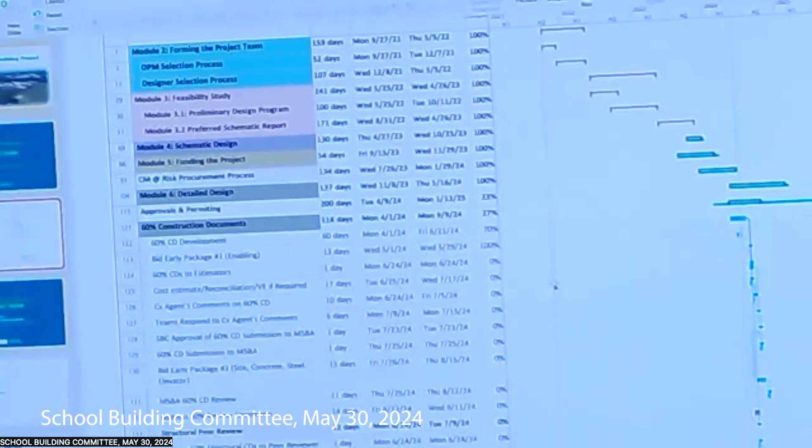And GAGs is Gagliarducci, correct? Just making sure. Jamie, you said GAG's at the number, Griffin's slightly below. They're both slightly below from what was advertised. So you guys gonna send us subcontractor recommendation letters? We asked Ben how he wanted to roll with that. I think he was waiting to talk to you.

Yeah, typically that's what we do. I would like you, especially for the early packages, to compare the bid price versus what was carried in the estimate, so we know that we're on track. If there's a savings or overage or whatever.

And the next package to go out, Jamie, is what? EP2, which is the entire site, concrete, steel, below grade waterproofing, elevator, and then some electrical equipment material. What's the date on it, Rich? 25th. Are you guys tracking on that? Oh, yeah, I know that date for a reason.

Vacation on July 6th. All right, the line item 124, it's 60% CDs to estimators. 624 is the due date. Correct. Hard for that? Yep.

I'll just hit on a few of them here. Line item 125, the cost estimate reconciliation running out till 7/17. And then line item 126 is the commissioning agent's comments on the 60% drawings, and that runs out to 7/5. So that doesn't give them a lot of time, basically only 10 days.

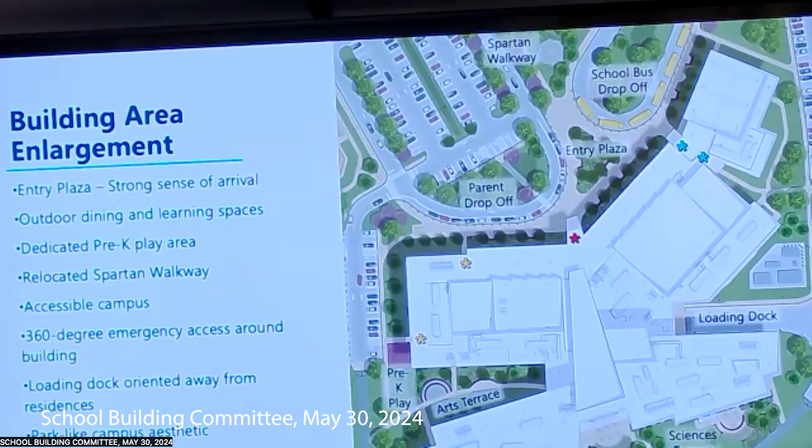And then we'll go into the individual areas. You can see we've updated the sciences terrace, the dining terrace a little bit, and the arts terrace is still a little bit in flux. So I'm not going to spend too much time on that today.

One of the first things I wanted to talk about was the discussion on the number of bollards and maintenance at the parent and bus drop off. Before, everywhere highlighted was flush curb, shown in green. We revised the school bus drop off, replacing 400 linear feet of flush curb and bollards with vertical curb, which allowed us to remove almost 39 bollards.

In the morning, when school buses are doing more of a rolling drop off, there will still be a flush area at the school bus drop off that can accommodate 6 school buses. In the afternoon, the buses can still use the entire loop, which will support 14 buses. We just didn't think we needed a flush condition to serve all 14 buses anymore, which allowed us to get rid of a number of bollards.

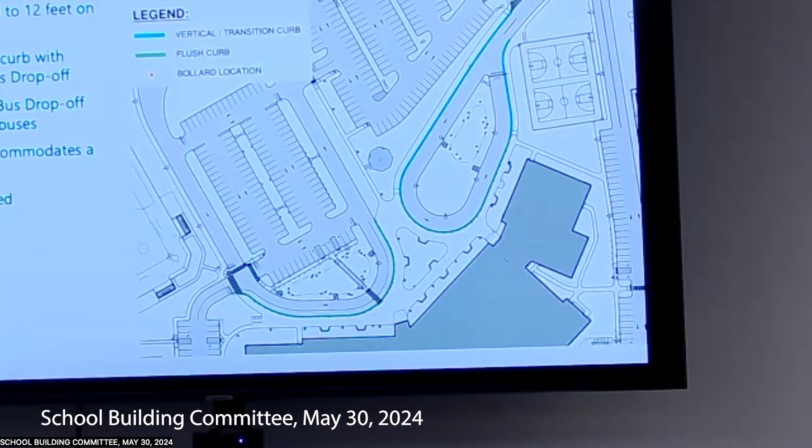I have a question about the bus drop off. I take the bus in the morning and we get there first, but I've been on a bus that's been late a couple times. I noticed students are always standing outside the school rather than going inside to sit in the cafeteria like at Birchland. Will there be shelter for these students in case of rain when they're standing outside, or is that more of a question for staff when the school opens?

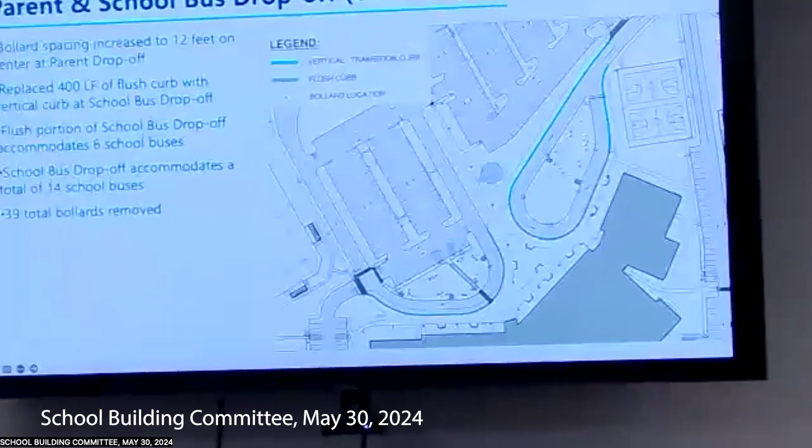In terms of outside, there are not going to be any canopies outside other than at the front door. There will be a canopy at the pool building that people could stand under, and a canopy at the entrance to the main school building, but not one of those long linear canopies.

My question is more like, do you know if people are still planning on having students stashed outside before school starts? It's an operational question. That will be something we'll have to answer as we get closer to opening the school. It's a good question, though. All right, thank you.

Staffing inside earlier - so that's just an update. Just wanted to let everyone know we've cut back on the number of bollards and simplified that.

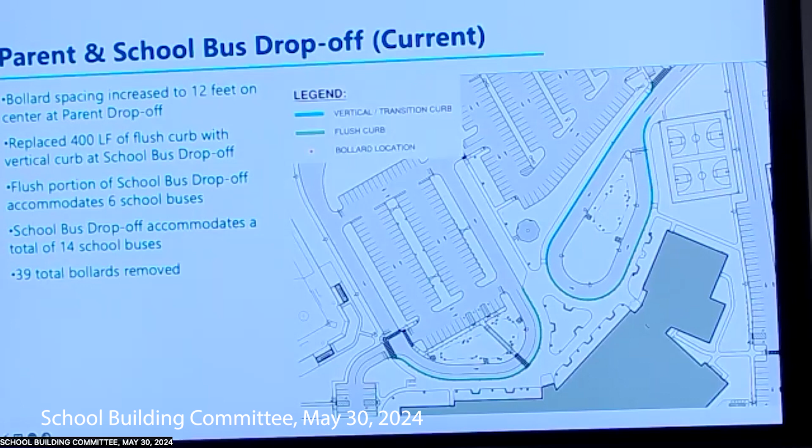We've actually started documenting the layout pattern so we can recreate it in its new location, which was super helpful, along with all the engraved bricks that are out there now. One recommendation we'd give the school and committee going forward, since this has been documented, is to maybe not install any more at this time, since they may not get picked up and we wouldn't want to see them or their location missed.

So start a new program with the new school - early adopters. All new bricks will be used except for the engraved ones, which will be reused. When we met with Rose, it was very clear each of those bricks needs to go back exactly where it was, so we are drafting that patio down to every joint of every brick, thanks to these photographs, to make sure we can plug them back in exactly where they are now in the new location. That'll be an enlargement detail.

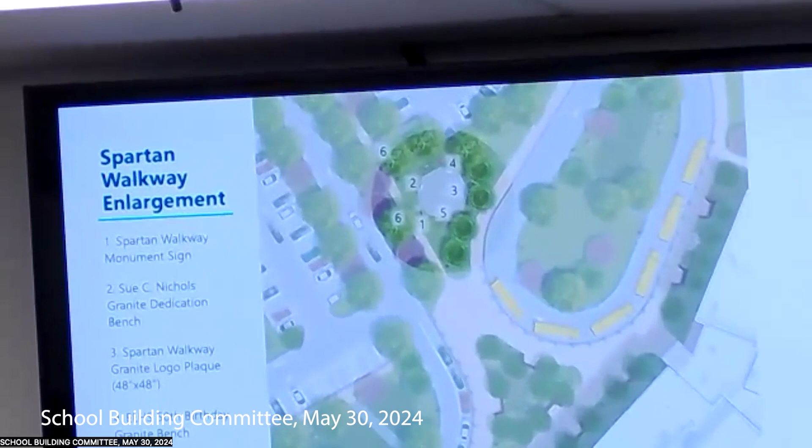Now a little update on the Spartan walkway. When we met with Rose, the desire was again to recreate it. There are a couple things out there - the masonry unit walls as you walk in were deemed not critical to the design of the Spartan walkway according to Rose. We probably will not replace those because we want to keep it a little more open as people walk in.

Another thing is the plantings around it were not deemed critical, but what was critical is to have something with interest all year round. That'll be our responsibility, to create a border planting that provides opportunities for people to take pictures with a nice backdrop. That's something we need to look at as we develop the planting plan.

But you can see what we've done here. Right now the existing patio has 3 bump outs for benches. What was discussed out in the field was to eliminate those bump outs and enlarge the patio by a few rows of brick, so that in the future, if more benches were donated, you'd be able to locate them around the perimeter of the space instead of being limited to those few bench nooks. It'll also make maintaining the area around the Spartan Walkway a little easier.

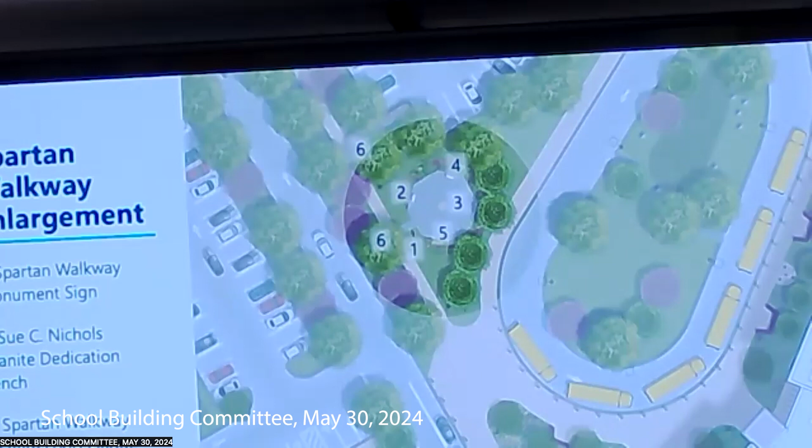So you can see we picked that location on the main pedestrian spine from Maple Street into the main entry plaza. Gordon, maybe you could speak to it, but it seemed Rose was pleased with that location and thought it was a good bet to move forward with. She was very happy with the new location. So, next slide.

This bridge will cross the bioretention area from the staff lot to the main entry. The width will be about 6 feet clear—you want to make sure that if necessary, two wheelchairs could pass, and 6 feet seems to be that width. The span is 56 feet right now, from abutment to abutment, with no central support.

There's a bridge in the budget right now for the retention area, for the water.

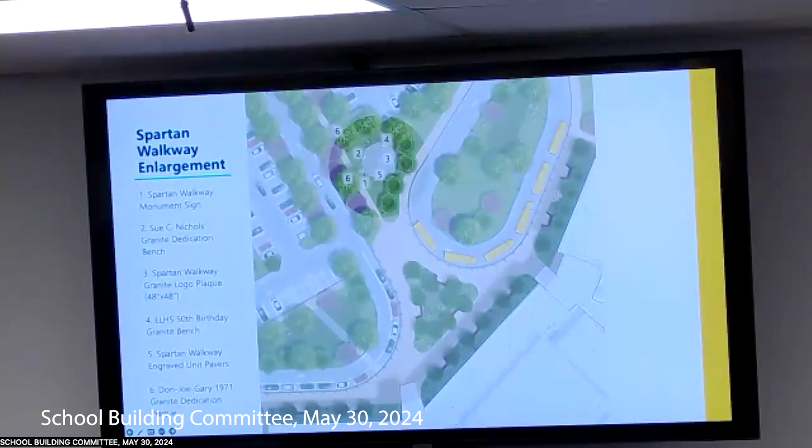Like, where would this just be a pedestrian bridge to cross? Is there a stream or something? So there's going to be a bioretention area for stormwater collection, and the bridge is going to cross it. That'll look cool. But it's not the only way to get to the front entry—if it were, we could make it a moat. I thought about a drawbridge, or a toll bridge.

So these are just some images of the bridge idea.

What are your plans for in there? Because I know, for instance, in East Hampton elementary school they put stones—mostly a stone kind of thing, and it looked really pretty. But I think on the kids' first day of school they were picking up the stones. These guys are older than that, but...

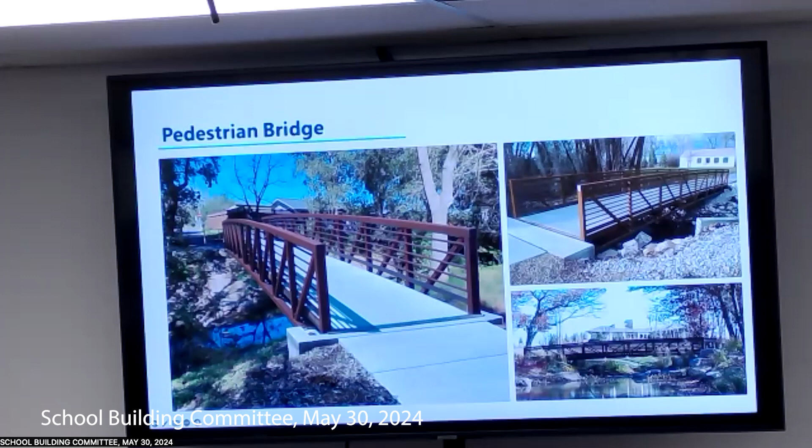So what we're planning to do is take this bioretention area and sort of evoke the redstone quarry motif. For maintenance purposes, it's going to be planted with a wetland wild native grass seed mix, with some wildflowers in there too—that'll be the predominant cover. It only gets mowed maybe once a year, with no shrubs and no trees within it, because that makes maintenance a nightmare. So it's just going to be that herbaceous seed mix, and we're hoping to get redstone boulders to place sporadically around the perimeter to give it that long-since-past quarry feel.

Nothing—if they can pick these things up, then power to them. As for lighting: when you cross the bridge at night, is there any lighting to light it up? We're working on that. There won't be lighting on the bridge itself, but there will be lighting from the parking lot and the entrance drive that will adequately illuminate it.

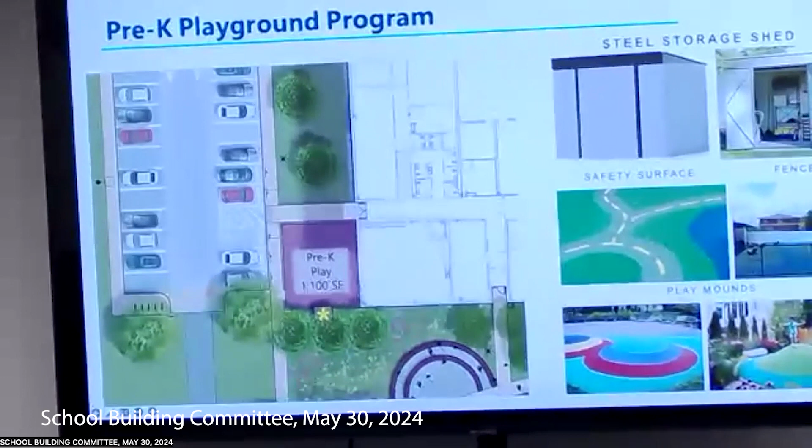Good question - we make sure there's appropriate distribution. For the pre-K play area, we'd like to reach back out to Juanita if the committee's okay with this idea. We had a lot of thoughts about this area initially, and in schematic design we went through a VE process. Right now what's proposed for this play area is roughly 1,100 square feet.

We're looking at resilient rubber playground protective surfacing throughout the enclosure, with a black vinyl coated chain link fence around it with 2 gates, giving 2 points of access that can be controlled by staff. Juanita had requested a 6x8 shed, so we're looking at something steel and low maintenance that protects whatever's inside from the elements, and we'll try to find something with a similar color to the metal paneling on the building.

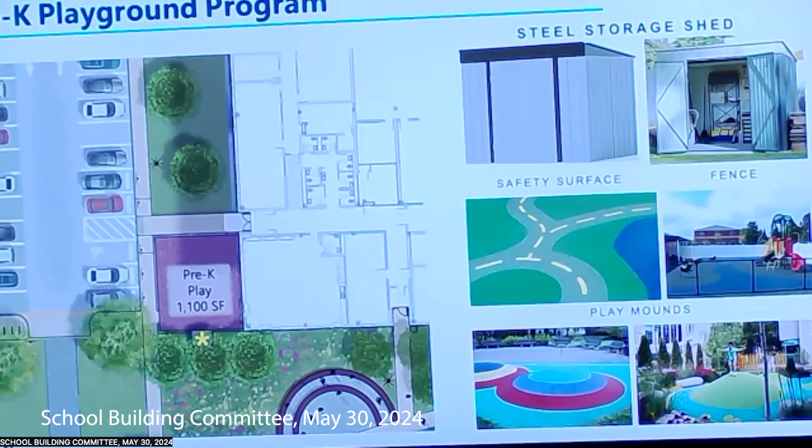These are just precedent images, not the exact products - just to give you an idea of what's possible. We're pondering doing some mounding of the rubber surfacing for kids to play on within the enclosure, and thinking we'd reach out to Juanita to ask if she'd prefer something mounded in there, or if she'd prefer it flat so it can be used for whatever the program requires.

Was that poured in place, the rubber tiles? Poured in place, yeah. If it's a mound, we'd typically do that over bituminous. If it's flat, we can do that just over crushed stone so it's fully permeable. It just depends on the treatment in there.

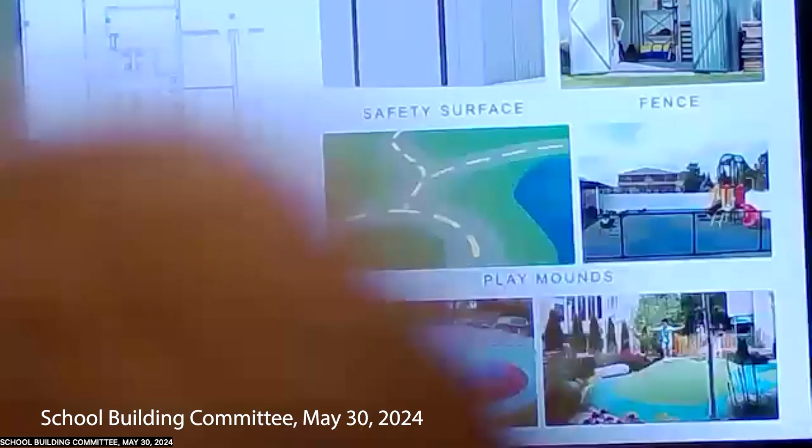So if the committee's okay with this, this is the direction we'd go - no play equipment, because that was VE'd out, so there's no play equipment proposed, just the shed. When it comes to the shed, let's make sure it's reasonably robust, because those things get beat to death.

Is that going inside the play area? Yeah - you can see the yellow asterisk is where the shed would be, tucked out of the way. The idea is the shed would be on a concrete pad, with a concrete edge around it to hold the rubber surface in place, and that's also where we'd set the fence. The fence will come right up to the shed and end there.

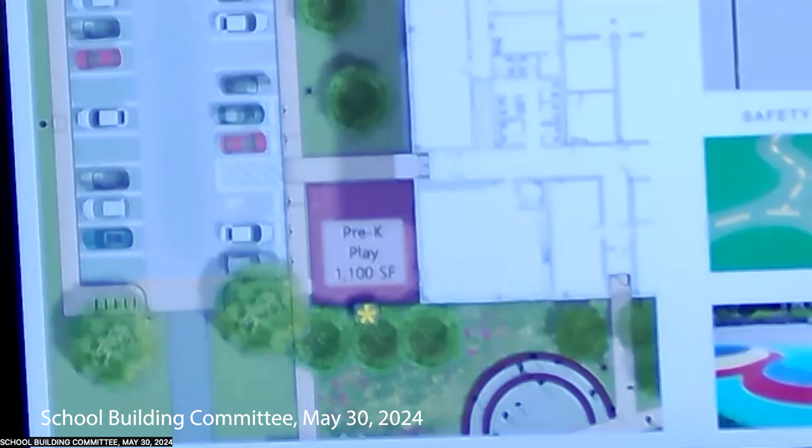Small point on this section - I know these are the bathrooms we're allowing access to for the fields. Can we put signage to that effect, letting people know there are restrooms at that door? Great idea, without being tacky I suppose. If we're gonna have them, we might as well tell people where they are. It would be building mounted. Okay, we'll put it in our cart.

And that's completely secluded, right, Christian? That works as we intended. Right, so we can close off the doors in the hallways.

We also made a modification to the seat walls at the front entrance. Originally we'd discussed curved, almost half-moon or half-circle shaped seat walls, but they were a little too big and didn't really respond to the architecture, which has more of a splayed look - more angular and geometric. I also thought about sandstone and how it's typically carved, with angle points that are more geometric.

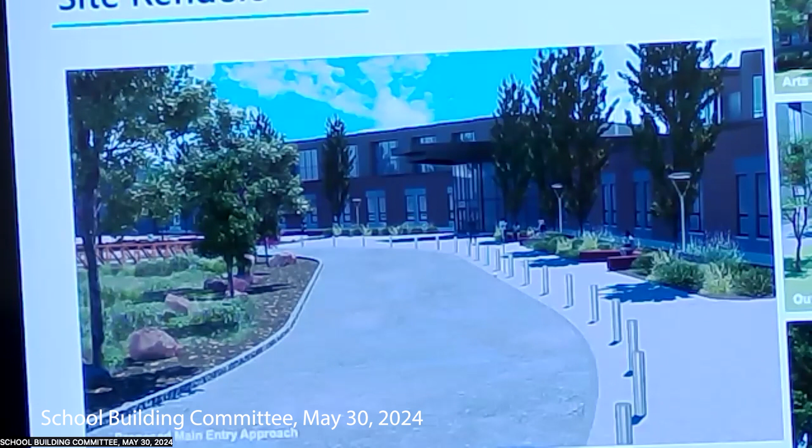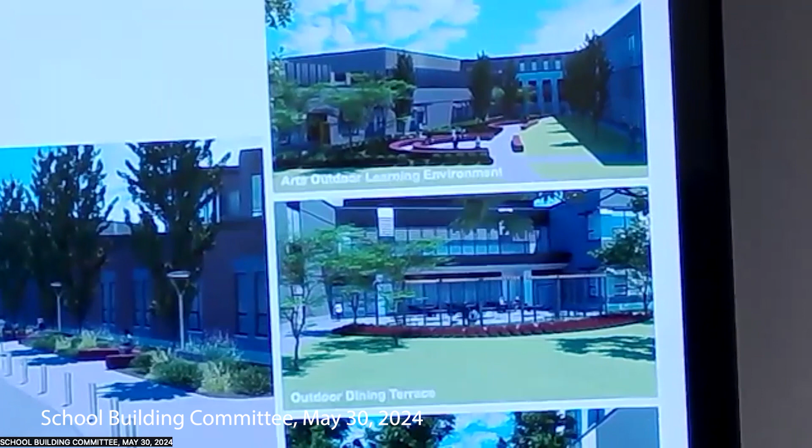We're still keeping the round shapes right now in the sciences outdoor learning space. You can see there's still a shade structure there, and you can see the outdoor dining commons also with a shade structure, and then the stadium seating in the arts area, the double ring.

The idea is that we'll have two seat walls, and one will maybe be 6 inches lower than the other. So for all performances, that's gonna be fantastic, just that minor variation in the height of the seat walls.

And this is just an enlarged view, more so the one on the right I would say than the one on the left, but this is the shade structure we're looking at. Again, very simple, galvanized steel, simple maintenance, but will still function to provide shade in that dining commons, with seating under it.

It'll also be the same piece used in the sciences outdoor learning space, where there'll be an outdoor spot where kids can sit on the seat walls, and there'll also be a second layer where kids can work underneath that shade structure. We just had to keep it a little further away from the greenhouse so we weren't shading it.

Is it wood or faux? That's real wood, but it's minimized. It's the steel ones—we weren't thrilled with what we'd seen for the slats. We felt that of all the places, this might be one where wood is typically pretty durable. It has a lifespan, maybe 20 years, 15, roughly—I don't know the lifespan off the top of my head.

I could get you that information, ballpark-ish. What material is it? It's ipe or some kind of hardwood—won't be ipe necessarily, but you can afford ipe, right? Yeah, it's usually hardwood of some kind. I can't recall exactly what this one is, but we can find that out for you.

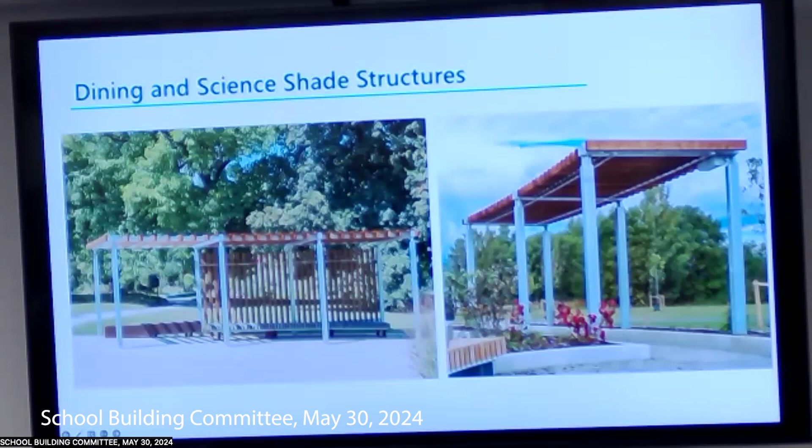Will there be outlets, like kind of closer to the building, where the little covered area for eating is, or out in any of these spaces, because their Chromebooks are never charged? So if they go up for class and the Chromebook's not charged, will they be able to plug it in? Will there be anything like that?

So there'll be electrical outlets and Wi-Fi, and I believe we're doing hose spigot hookups in the art space, the sciences space, and the dining space. Not in the front plaza, because we had discussed that wasn't as desirable as in those outdoor learning and dining spaces.

And that'll be further coordinated as we finalize the design. Never charged—plug them in.

So then a question had come up—Principal Frank Page had asked about, he's online now, oh great—he had asked about potentially adding a few gates to control student traffic.

So the first one to call your attention to is from the student lot. The idea is that when the school buses are yet to be released, Frank was concerned about students trying to get in front of the buses and leave before they do. Rather than having somebody go out and set up cones every day or stand in the road to hold students at bay, the idea was that before dismissal, those two gates could be closed.

Once the school buses are released, a staff member could go out, open those gates, and then the students would be free to use it. That's why we set them in—it's more about keeping students from leaving via those two points of access until they're supposed to than it is about people getting in.

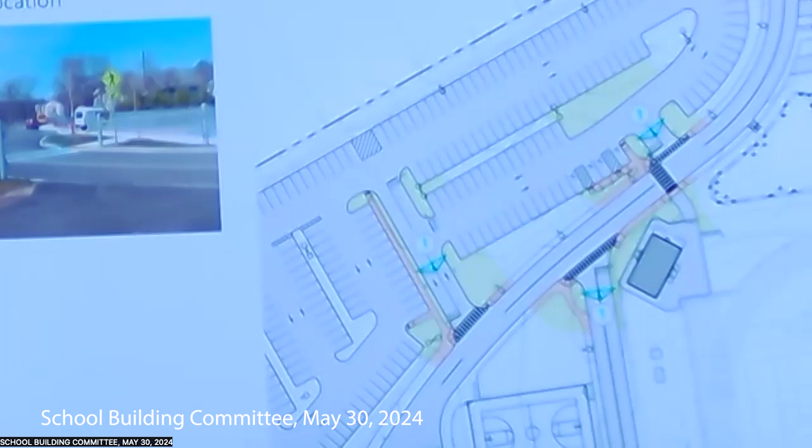They can leave through the other horseshoe, right? Yeah, the intent was that before the school buses leave, the parents or students would go out towards the main, the new horseshoe we'll call it. Swing gate or retractable? Yeah, you can see right there, because of the width, it would be a double leaf galvanized steel swing gate.

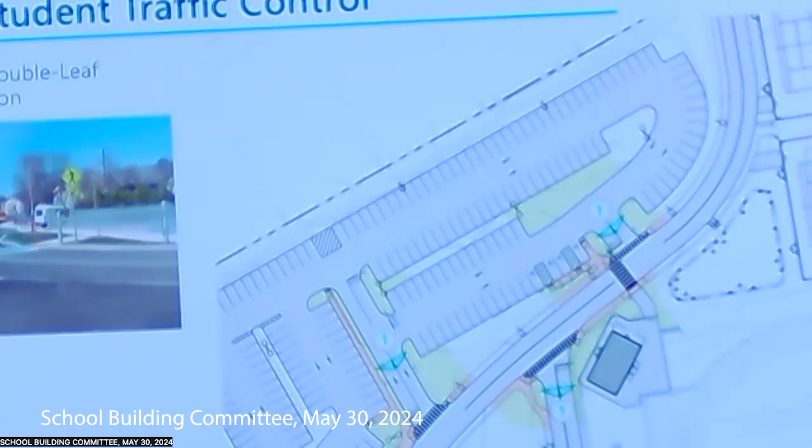Very simple, low maintenance, and there would be keeper posts to keep those leaves open most of the time and locked open in an open position when they're not closed. And that's just an example.

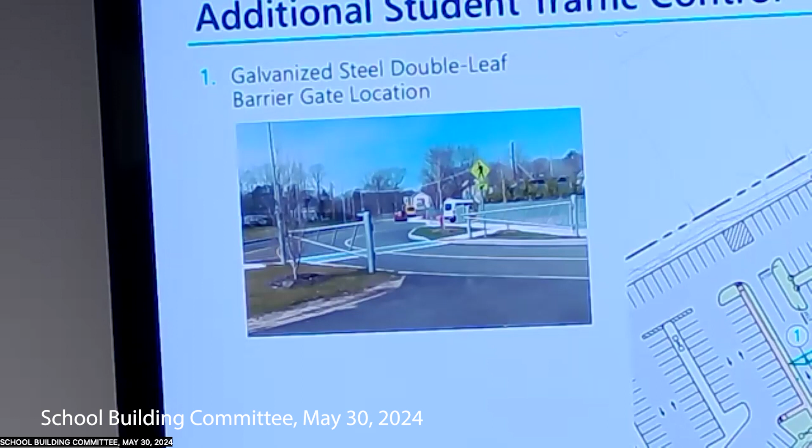The other one Frank had asked about was potentially a gate at the entrance to the service drive. Frank's concern was that students coming in the morning may try to park down by the pool entrance, the rear pool entrance, or in the areas where custodial staff or kitchen staff might park in the back. So the idea was to add a gate that could be closed until most of the students were in, and then that could be open.

So I guess what the design team needs is direction from the committee on all three gates, one or more of the gates. We just need to know which ones the committee would prefer to install, if any.

They're going to be manual, not electrified. Manual, yes. That third one, most concerned about for access for swimmers, for early morning deliveries.

I'd hate to have a custodian have to run out there every time somebody wants to get through. I understand the concern about students, but maybe we can just create the culture that staff don't come in early and allow them to park there. We've tried to create that culture. It's easy for me to say.

Is there a student number? I mean, the spaces aren't numbered right now, right? There are other ways, I think, to control it. There's a line and a sign for parking spaces. Assign parking spaces and assign staff spaces, so for those staff parking off of that drive, it's clearly marked. I guess there's other ways to control it, but that's for consideration.

At home, there's a culture. They don't want to get towed more than once.

If you had those first two gates closed, really, they would have to come in the bus loop entrance to get to the service entrance in the morning, right? They're going to have to come in the bus loop anyway. Wouldn't you say custodian or food service, if they wanted to get to the side parking, they would have to come in through the student/bus entrance? Right. The only time, my understanding, the only time those two at the student lot would be closed is during afternoon dismissal, just to prevent them from cutting in front of the buses. That's because you want them to have access both ways. Correct. It seems like the gates give you flexibility to then make those decisions.

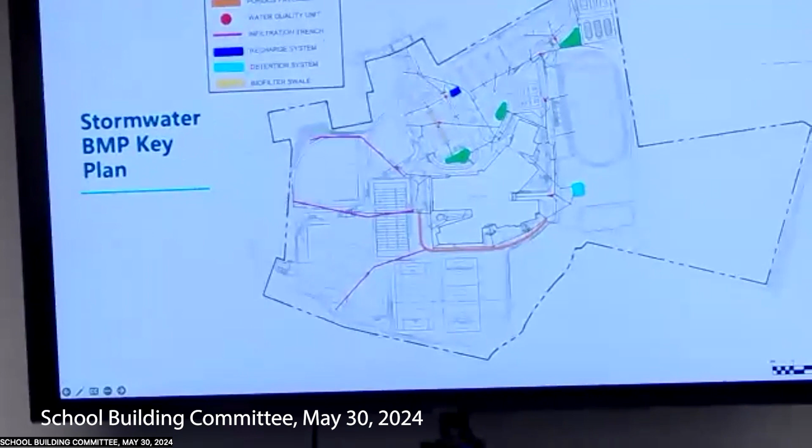Yep, but we need it - stormwater, we have to offset the. Can you put some wildflowers in there rather than just grass? Usually the mixes come with a combination of both. The concern with a wildflower mix we've found is it usually takes a couple years to get established, and a lot can happen in two years waiting for that to establish. So the mixes typically have some wildflowers in them, and sometimes those seeds propagate themselves over time, but we'd want a quick establishment of species, and we'll go through the mix and species in that.

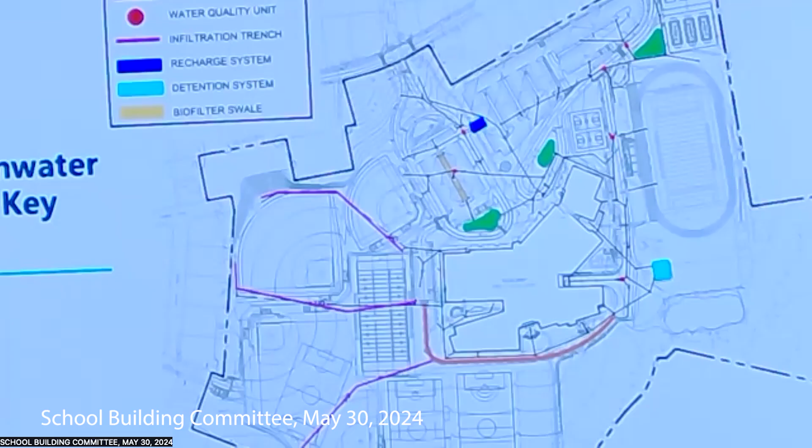What are the maintenance requirements of these? Usually an annual mowing in a bioretention area, because some of them are designed with mulch, but we're not doing that here - we're not proposing a mulch bed like some of them are, we're doing it with a seed mix. This is a weed, on purpose - intentional, intentional weeds is okay. Yeah, I might deter kids from trying to walk through it too, if it's a little higher.

There are some questions on concessions, especially the view from where you're selling tickets and providing food to the field. Seeing it in the context of the site plan is helpful. We're a little restricted on exactly where this concessions building can go in terms of proximity to the parking, and also for emergency access for ambulances through those double gates. So we're angling it to have views to both.

You have a throughway hallway in between, and then the men's and women's rooms to the south. Did that help? The comment was about the view, like watching the game while you're at the concession stand. If you're the parent selling the burgers, can you see the game? Because the parents are the ones that work it, you want them to be able to see the game.

We can't move that hallway, Christian, right next to the food window? I know it's central, I get it, it's like, where else do you put it, but it's like putting the bathroom door in the kitchen. So all the people walking in and out of the bathroom are right here as I'm ordering my cheeseburger, which is fine, but it's one of those things.

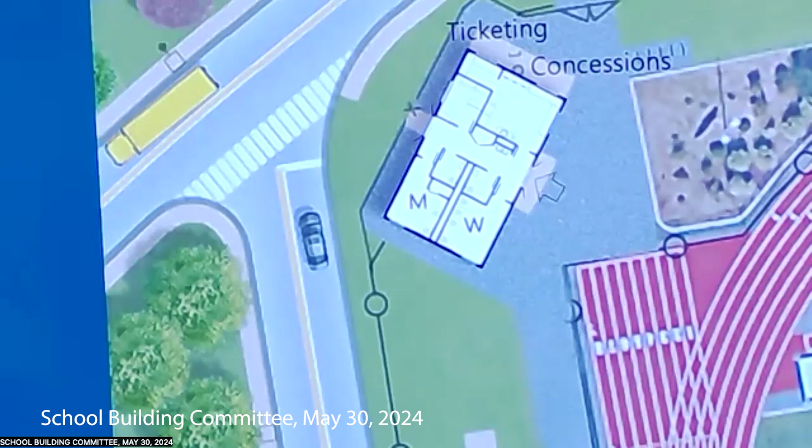That's gonna be tight back there, because you have a 6-foot height fence, it's only about 5 feet wide. Isn't 5 feet enough? Well, it's enough, but if everybody was going back there. Whatever, we can move on. I don't love it, but.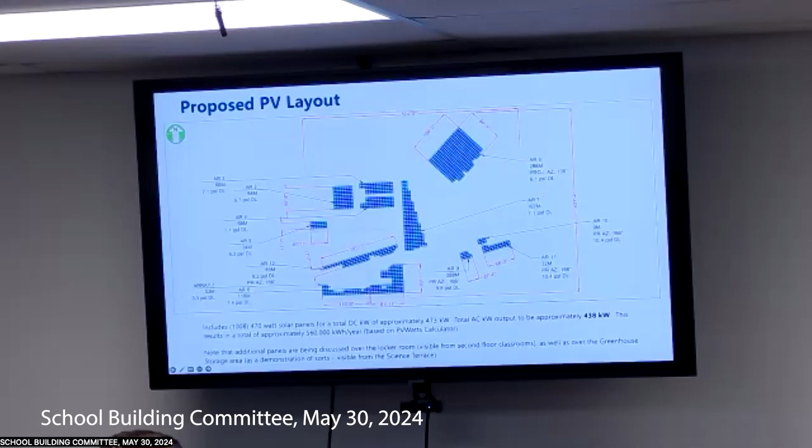George Martin with Ellen Consulting, talking about PV. Basically, this is showing our current layout, where we try to optimize the PV layout to get as much basically KW up there as possible. There's coordination with some rooftop mechanical equipment and some different elevations of roofs, so this takes into account potential shading, et cetera.

With this layout, we were able to get 1,008 470-watt panels, equivalent to about 473 kW DC, which can produce about 560,000 kWh per year. We'd want to model this for the actual usage of the building, but it's probably about 20%, could be upwards of 30% depending on how the building operates. I don't know if anybody has questions about the layout, but let's move forward.

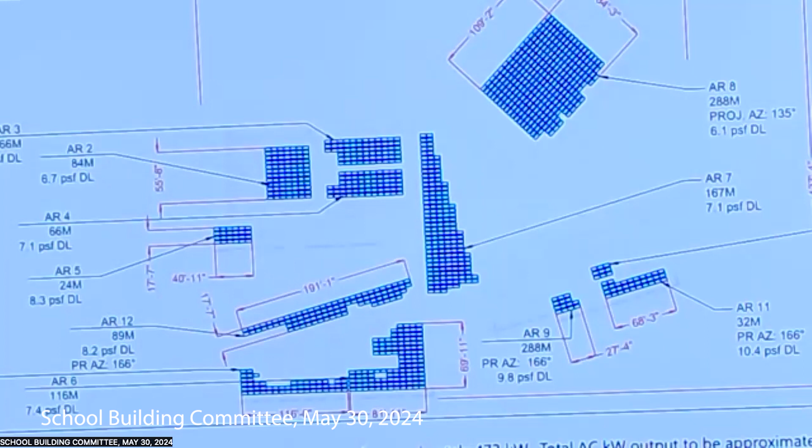No, this was, sorry, Gordon. Keep going, one more. And one more, thank you. I cannot see, is that in focus, or maybe not for me? Why, what's wrong?

Any questions on the PV layout first on the overall roof plan? There's a small note down there. We were just talking about that.

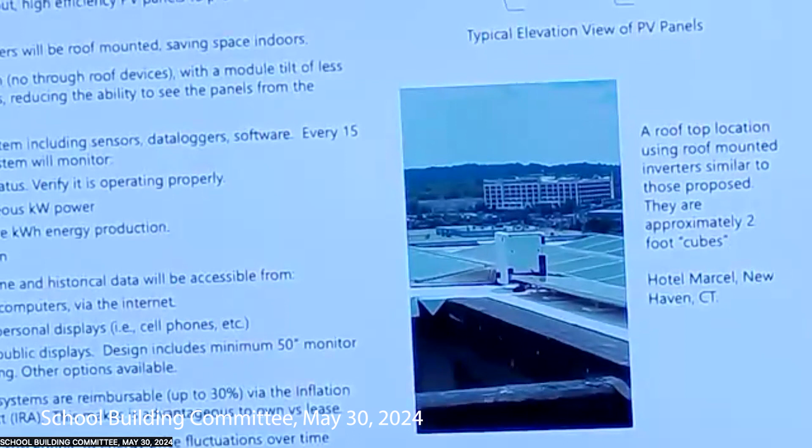Ellen Consulting is our PV consultant on this, and we were just talking yesterday with SMMA as well. I think there is an opportunity, especially on the south side of the building over the greenhouse. There's a small storage area to the left of it, which has a sloped roof, again pointing almost due south. That seems like a perfect area to put a few panels as almost like an educational display of sorts, right? So now kids from the south can see that right there over the greenhouse.

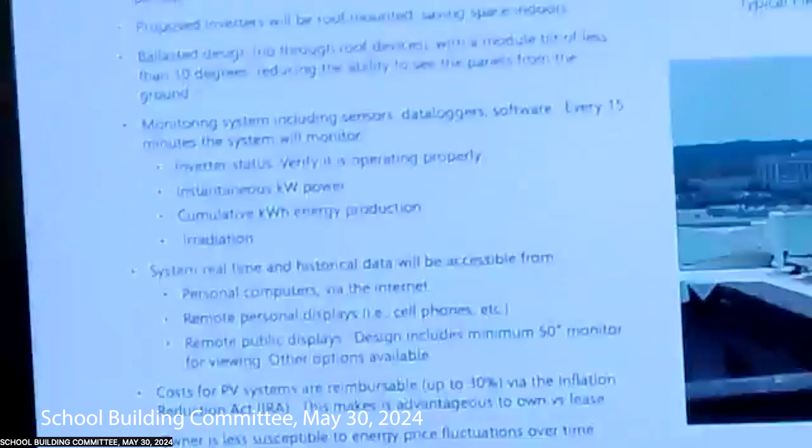We're also thinking about potentially putting a few over the locker rooms. They wouldn't be visible from the ground, but they would be visible from students on the second floor of that classroom wing. And then of course we've got displays in the building, so it won't be a secret that there's PV. We're trying to balance two competing goals: keep them up on the roof where they're most efficient, but also have them visible to the students. So Christian, given that constraint, are we effectively maxed out with the amount of panels we could put up there?

So broadly speaking, is that something that we would want to max out as much as we can? I imagine we are maxing it. Well, you just said we're not. We maxed the budget out. Right, correct, yes. Not the square footage. I don't think we took into consideration IRA rebates, the 30%. So can we gain another 30% at the same cost? George is going to talk about that momentarily. Alright, should I continue then?

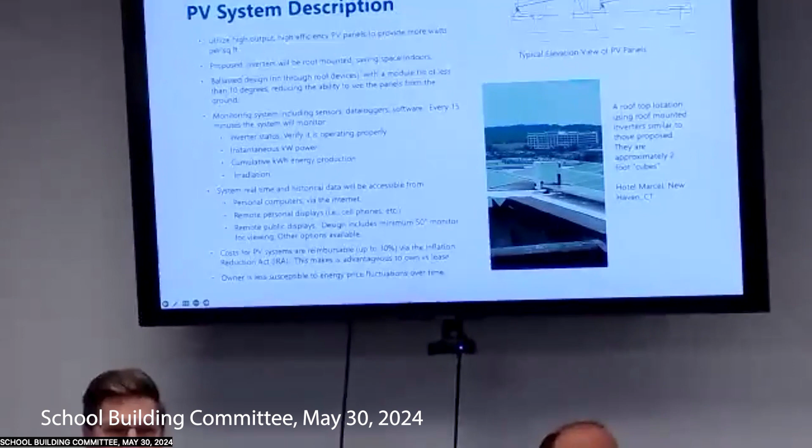Sorry Gordon, back here a little bit. So, as part of the design, we utilized high efficiency panels to kind of maximize our output if possible. We typically like to use the Sunny Boy outdoor inverters, which is in the design. We like them because they can be outdoors and you don't have to use internal space.

And then the ballasted system for mounting these panels also means no roof penetrations, or minimal roof penetrations. Obviously you have some main conduits that have to go down into the building, but you don't have penetrations at each inverter. So I think it's a very cost-effective installation, and if you ever have to replace these, which you will at some point, the inverters, it's a simple crane up to the roof.

And they allow for monitoring, so you can build up a kind of dashboard if you want in the school or on the website to show what you're producing. And yeah, it talks about the Inflation Reduction Act.

So now, with the elective pay option, the school would be reimbursed. It would be after the installation, so you'd have to cover the cost. When it's put online, you get that 30% elective pay back to you. So it's there, and technically you could use that money to then fund another round of PV if you wanted to, if you only had a certain budget right now. So we could always provide provisions for future, and once you get that elective pay, you could use that again for additional solar technically, but there's ways to play with that money. Does that make sense, Greg?

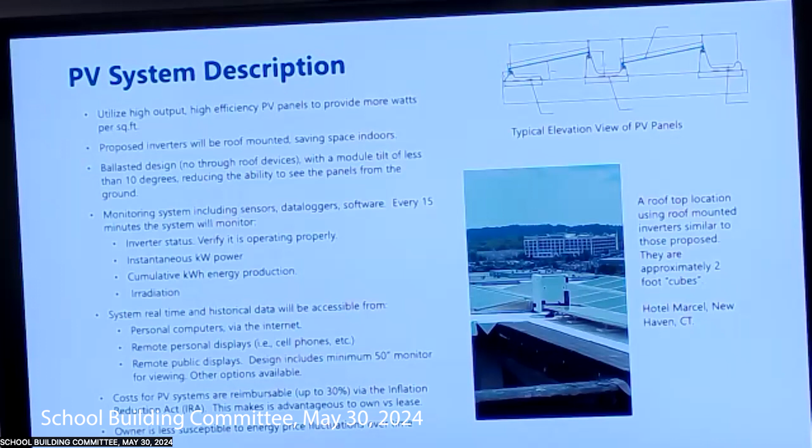But we would not do it that way. If we're going to do the 30%, we would do it all at once. But yeah, sorry, George. Yeah, that's totally, you can definitely do that. I was just saying, if you only had the 450K budget, the KW budget, then you could technically just keep that budget and provide provisions for the future.

And then once you get that credit for the 450K, you would actually use that credit to pay for the additional percentage, if that makes sense. It does, George. I think the issue would be the time it takes to get the credit. That's really the issue, because if we got it back in time to use it on the project we could, but you're saying we wouldn't.

Yeah, the system has to be online and operational. So we would have to come up with another $150,000 to realize it later, after the project's done. Well, not even come up with it, but...

I would certainly make the provisions for additional capacity, whether it's switchgear, conduits, or whatever, so you can add it in the future. We could have all the roof penetrations in, and if it's just a ballasted installed system, it's not easy, but it's just that and conductors.

Did we see how much the estimated payback on these is, the percentage of energy created? Do we know that, 30%? Yeah, the current system, the 450. A rough cost based on if you get the Inflation Reduction Act, it's going to be like 5 years.

So George, my question is, how much of the energy this building uses will be generated by the PV, roughly? Well, I think we're thinking it's 20% plus. Okay, and so another third will get another 5 to 7% ish, something. Yep, if we did another third.

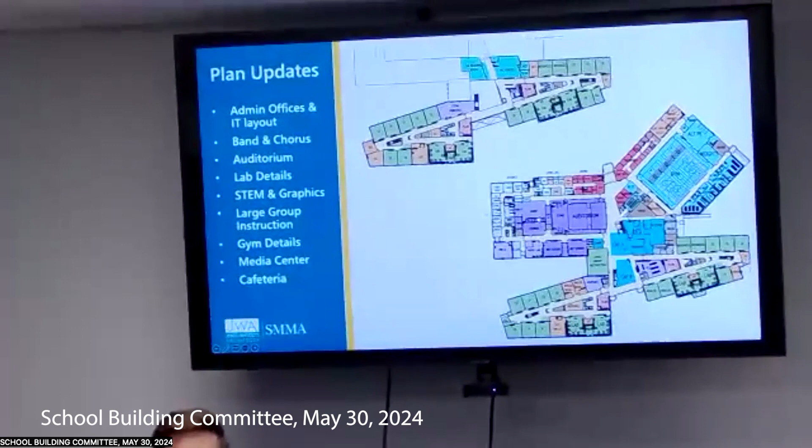Sure, you're very familiar with our colored plans by now. We've been making a few updates. At this point we're mostly in coordination and detailing, but there were a few areas that got some changes we wanted to bring and share today. So some changes around admin, band and chorus, auditorium, some of the lab spaces. And then we're going to show you a walkthrough through some of the main spaces of the building, so you'll get to see the spine, the cafeteria, and media center.

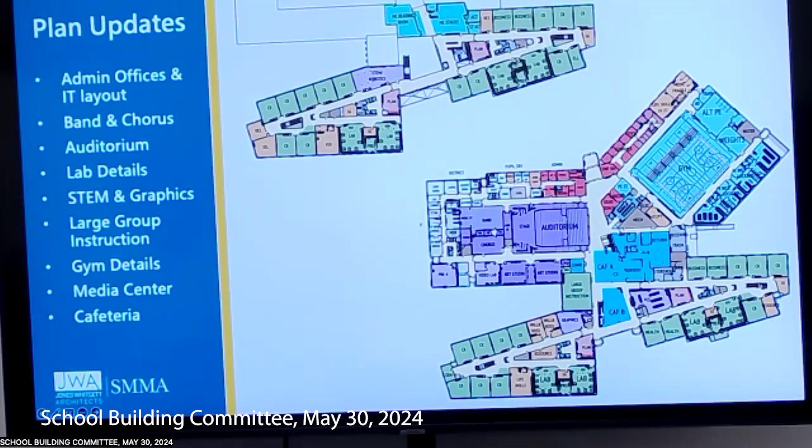A Wing is the place we had the most revisions. We had a number of meetings with staff and faculty, and that's what informed some of these conversations, starting to look at how the spaces are really used. Along the top and west side, left side there, has some swaps. We moved where the bathrooms were in the district offices, so they're a little further away from the admin desk, and we brought storage closer. We moved the kitchen, so now the kitchen space will be a little bit bigger and shared between school admin and the district offices. So that's a shared space now.

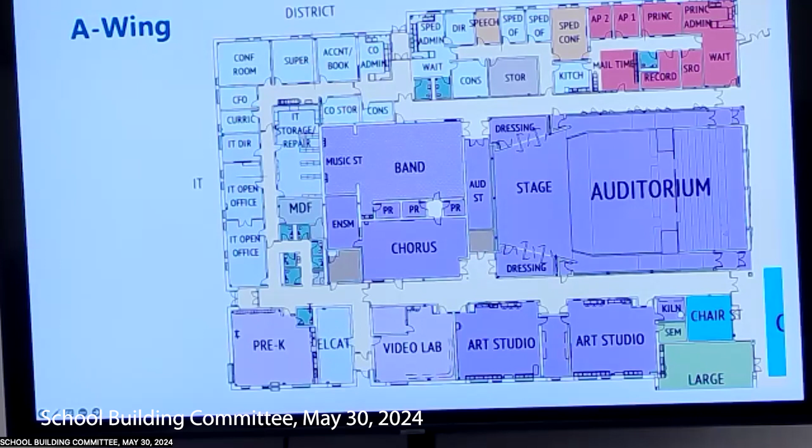Conference room - how big is the conference room in the corner? I think it's like 360 square feet. Compared to this size? Yeah, like half of this, like the wall. Less than half. A little less. Did you count the tiles already, Ryan? No, just guessing. So I got nine. Sorry, yeah. Talk amongst yourselves for a minute. Right, there is.

Okay, great, we can go ahead to the next one.

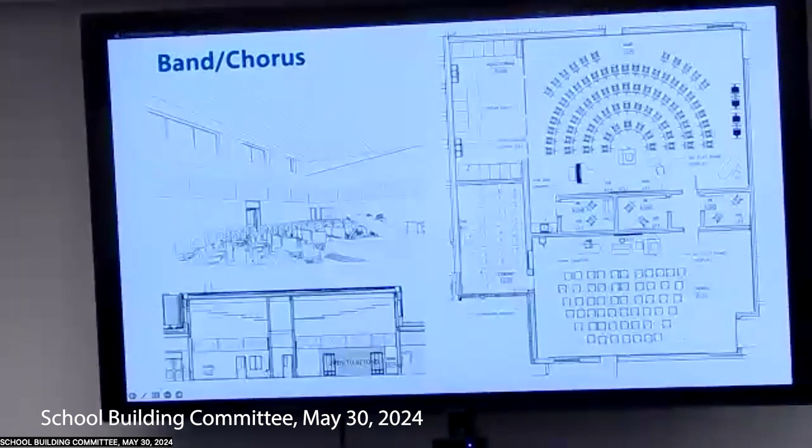So we have some zoomed in plans for band and chorus, had one of the bigger reconfigurations. We shifted the space around a bit to better account for the fact that band and chorus don't actually need exactly the same amount of space. So band room is now a little bit bigger, chorus is a little smaller. We had a generic ensemble room, but that's now going to be the keyboard room, which is a specific need that chorus has. Got added, yeah, cool.

You can see the image on the left, we've been developing the ceiling more. So we're looking at this step ceiling, which allows it to step up to the clerestory windows while still concealing the mechanical that's running above there. There's mechanical up there to conceal. So getting into the details with the ceiling, and we've had conversations with our acoustic designer, making sure we have the right percentage of reflective and absorptive material, things like that.

What is that space to the left of the band room where the display cases are? Is that separate? That is connected to the band room with an opening. That's music storage, so it's the big storage for all the instruments, but there are also display cases because we know there's a lot of awards and trophies. For the whole district, the town, or just for music? For music. Okay, and to that point, do we have a trophy case to replace this one in the main hallway outside the gym? We do have trophy cases. Okay, we have over by the gym - someone had asked me that, and yeah, that exists. Okay, thank you.

So a question on Hall of Fame. Oh, that one too, Hall of Fame. There's a number on the north side of the gym, we have quite a few display cases built in there. And then there's some by the PE entrance as well. Yeah, and we could probably go through those and refresh those too, or not.

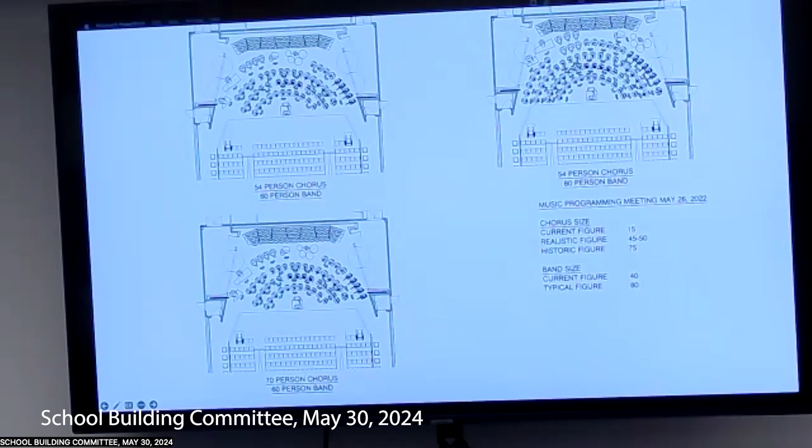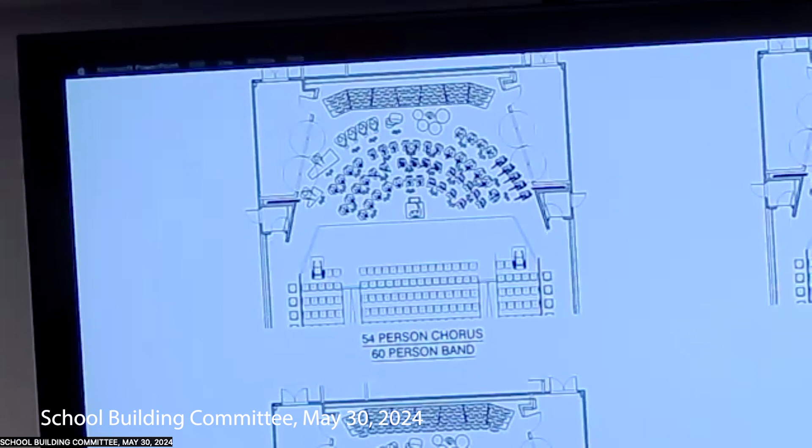So here are some studies that the theater designer did for how the stage can be used for both choral and orchestral performances combined. You see in the back, you have the choral risers. By doing it in this configuration, we're able to reduce the size of the pit and bring some more seating in at the front. This kind of setup is actually the way all professional and collegiate level mixed ensembles are set up, with the chorus behind.

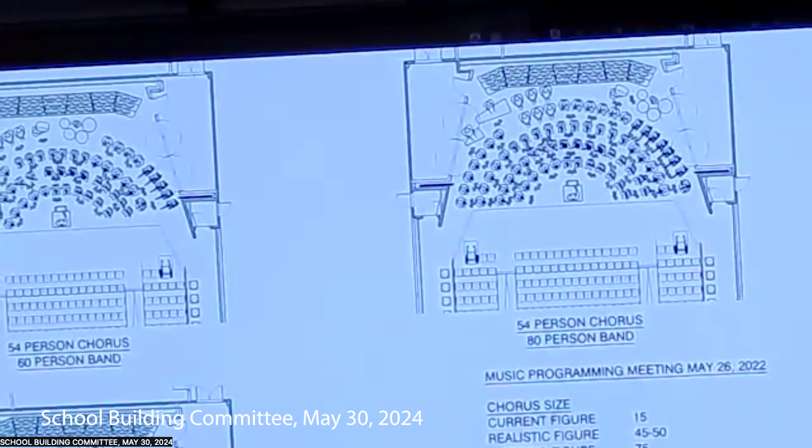So this is, if you were to continue on, this is the way it would be arranged. Just to give you a sense, you can fit a lot on that stage the way it is, so we feel pretty comfortable bringing those seats up and getting that extra seating in there.

We're going to purchase the stands, Jill? Yeah, of course, it'll include it. Okay, great.

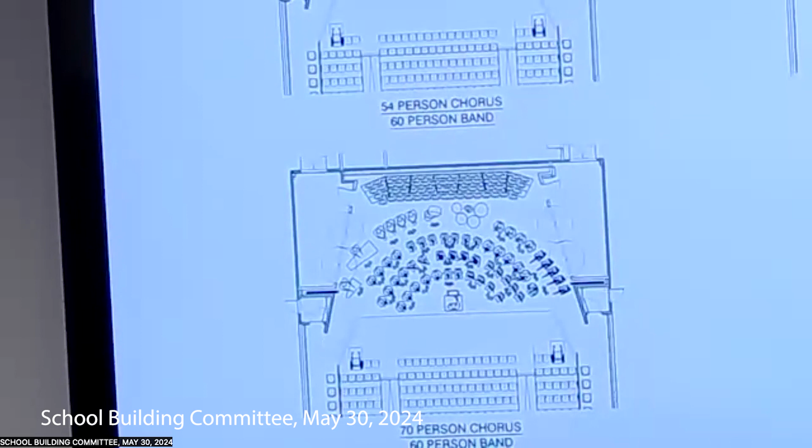Has a choral teacher seen that? It's pretty cool. We have had conversations with them. I don't know if they've seen this particular setup, so we can make sure to share that when we need to share the new band room anyway.

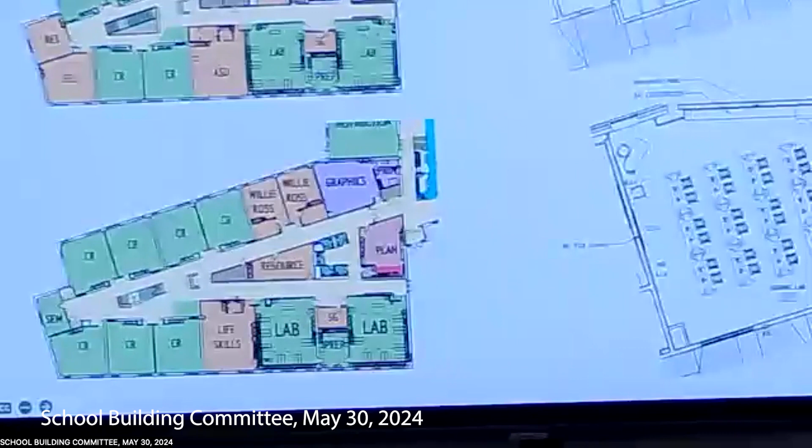Okay, any more on that? Yeah, no, we can go ahead.

So this is the E wing, that West Academic wing, into two levels. I just wanted to call out the STEM lab, which is on the second floor, and the graphics studio, which is on the first floor. Those are the purple spaces.

So here, the shape, the plan hasn't changed a ton, but we've been doing a lot of refinement, adding in workspaces in both of these - actually a pretty substantial workbench in STEM, places for a number of 3D printers, so getting that all mocked up.

Mobile workstations, we're starting to look at furniture, so where you'd have built-in shelving or furniture shelving, things like that. So STEM is going to have a lot of flexible storage, a lot of workspace, and then their robotics field off to the side, which will be a very neat space.

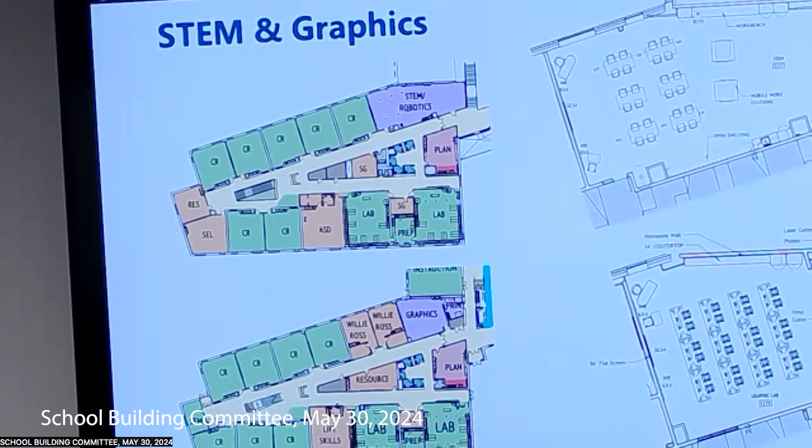And then in the graphics studio, that's now set up so it can have 24 computer workstations, so students can be doing computer work. We also have the counter for hands-on work.

Then the printing room off to the side, which has a laser cutter, the hydraulic paper cutter, the vinyl cutter, and large plotter. We've added another door there, and we've also added a sink. So that extra door off the main hallway should make it easier for art teachers to use, or to make it a really interdisciplinary space, so it's not just controlled from the one side.

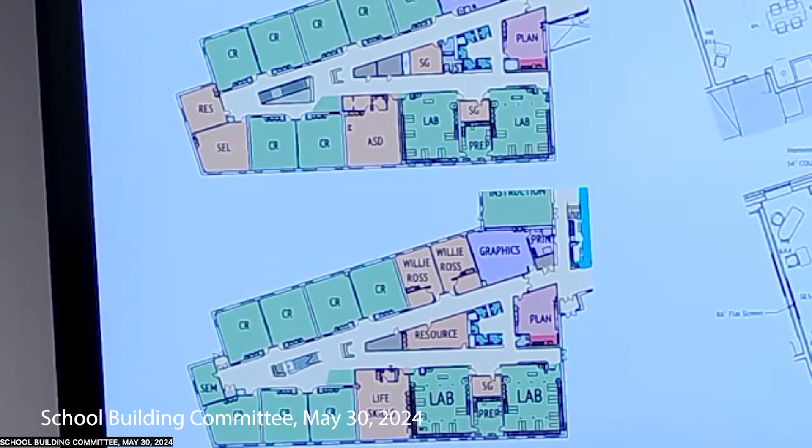Do we currently own all those machines? Yeah, some of them the school already has - we're bringing in and designing for that. And then I think some of them are new, I'm not sure, but it'll be fully furnished with all those machines. Okay, great.

Labs - again, this is just getting more into the details of the casework, getting all of what's furniture and what's built in worked out. Getting our ceilings designed, so you can see in the rendering there's going to be a unistrut in all of the labs, so you'll have pull-down cords, and anyway, just to give you a sense of what these are starting to look like. I think they're starting to come together, but it's a lot of little pieces to be presented.

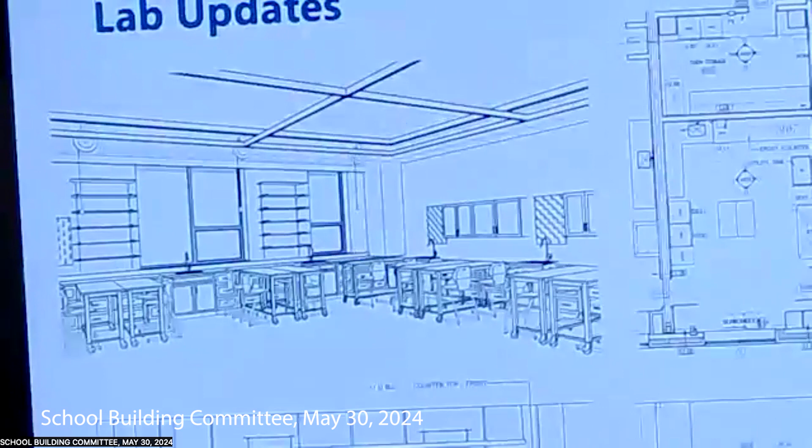I'll talk a little bit about the gym. We've been talking to Kevin and trying to bounce back some ideas, which has been super helpful.

This is early on. Usually we're doing this process, well, to be frank, sometimes we're doing this during construction. So it's helpful to be doing this nice and early, figuring out all the implications with what's going on at the ceiling of the gym. We have 6 different basketball hoops that all need to fold up, a batting cage that needs to get stashed somewhere up above, and the wrestling mats are going to be in alt PE, not in the main gym space. Just looking at how we want to organize this.

So we've bounced some ideas back and forth. Kevin was interested in simplifying the line work, so that's what you see here. You have a main basketball court in black with Spartans and East Longmeadow. Again, all this can change going forward, but it's helpful to get an idea of the amount of paint and how we're going to lay that out. And a main volleyball court shown in white, running east-west.

The dashed line at the top—the floor plan right now is showing all of the bleachers stacked against that northern wall. Those will come all the way out to that dashed line, about 5 feet off of the basketball court when fully extended. And then you've got your practice courts on the side as well as a practice volleyball court. You'll have a center net divider, so you can lower that while the 2 practice courts have a little bit more isolation between them. So just trying to get a feel for all of that space.

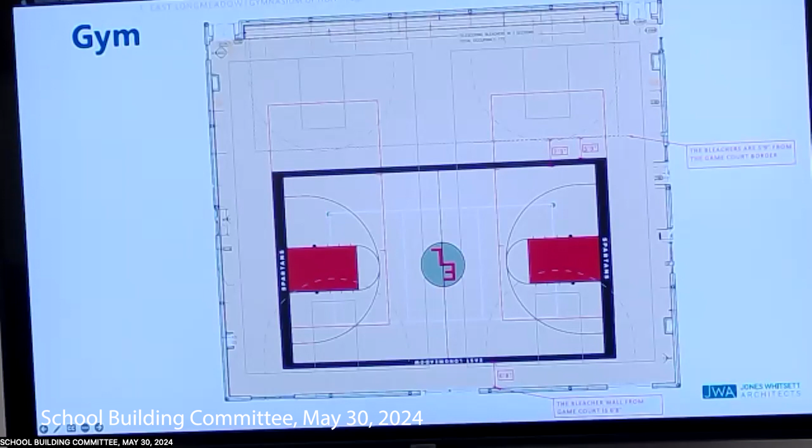Great. And now, if you wouldn't mind switching to that other view.

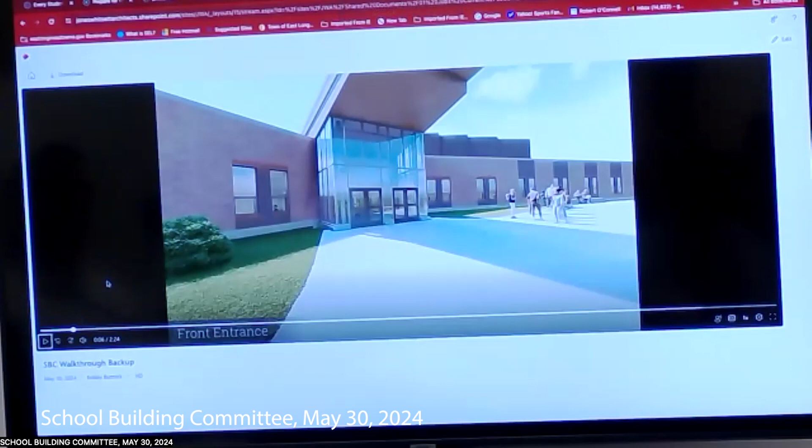So we've been working on a walkthrough of the interiors in particular. It's really helpful for us because this is truly what we're seeing inside of our 3D model, our Revit model. We're able to look at materials, and we're also able to see things like when a pipe is sticking into your head as you walk through a door. We're going through a lot of those coordination issues, but we want to clean this up just a bit more. I think it would also be great to show this to the public and really get people excited about what they can expect for the inside of the building. So Gordon, if you just want to run it.

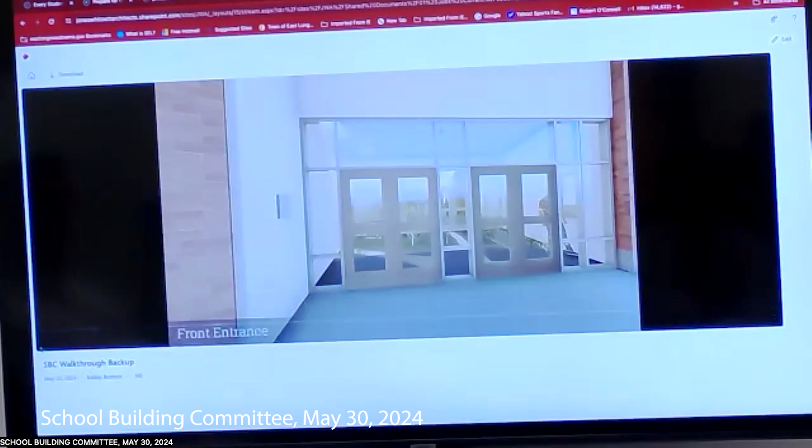So we're just coming in the front entrance now. Admin's on your right. This is the central spine with the teaching stair up on the left. We're thinking a lot about robust materials in this area.

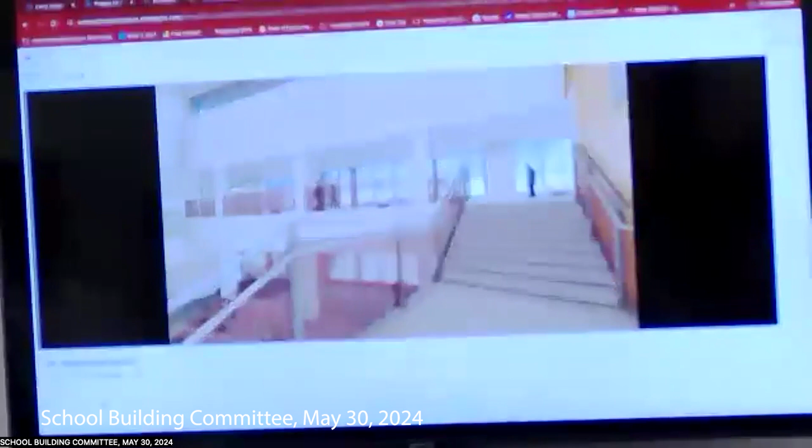And now we're taking a right into the auditorium. So there's that image you just saw from before, but a little more enlivened. You're going under the media center right now and the cafeteria, then opening to this 2-story space with really nice filtered daylight coming in from the south. Coming up the main stair here, classroom wing on each side of you. We'll head to the eastern classroom wing very quickly, running through the building.

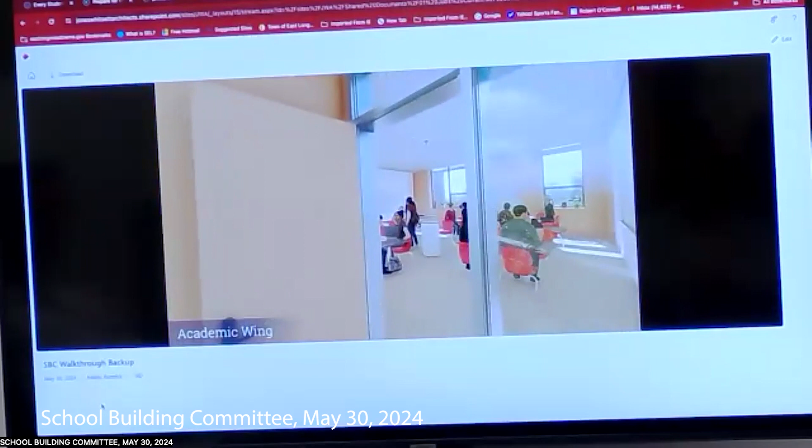All of the classroom doors are inset in the ceramic tile on each side, which enlivens that junction and also provides a nice sturdy surface, helping identify those little inlets where the classroom doors are. This is where you'll have clerestory light coming down from above, and then this nice large opening down to the first floor as well.

And a little bit of room on the side here for breakout spaces. You can see we've started to put in things like interactive TVs on some of the walls.

Are the railings glass or metal? The railings are metal, and we're thinking in that specific area, higher than code minimum, just to give us a little bit more peace of mind.

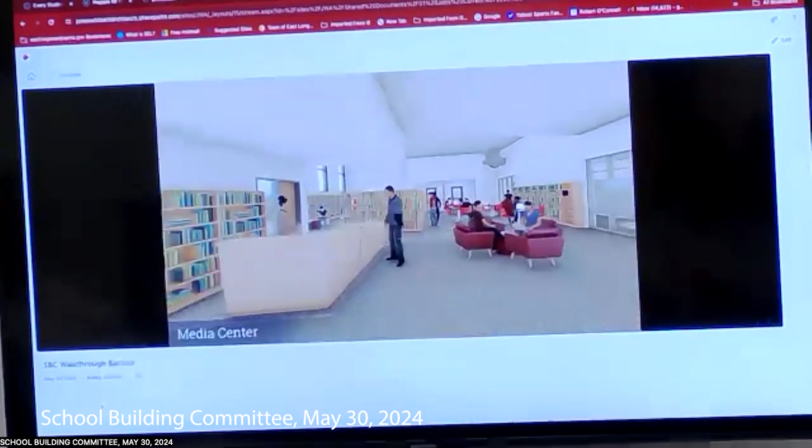This is the media center, and we're going a little quickly. We can head back if we need to, and now we're going down the central stair here.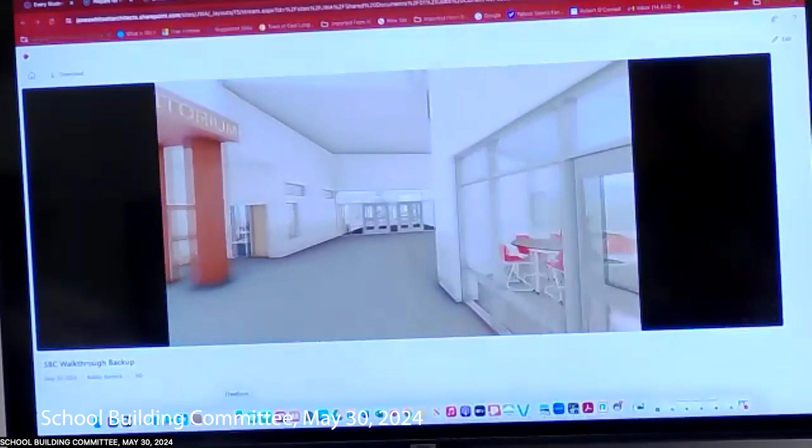When you say a little bit higher on the rails, we've run into this problem on a couple of projects where the rails were low and there was concern that people were going to jump over. So the 42 is the code minimum, and that feels pretty good, but we were looking at 48 to start with, so we'll feel quite a bit better.

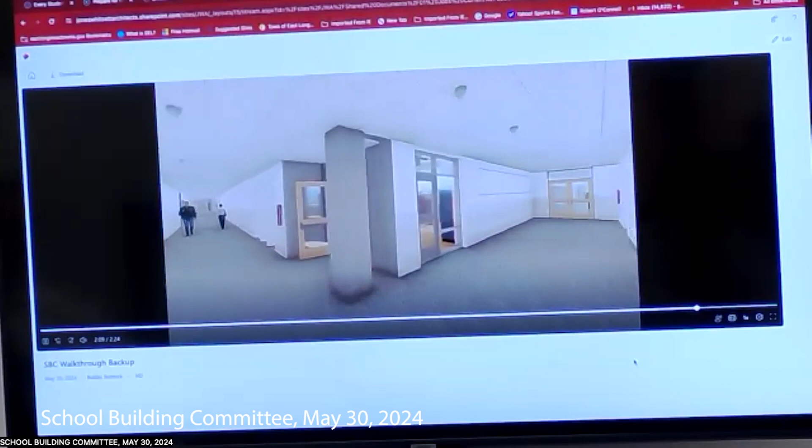This guy runs fast. So guidance is on our left, and nurse is further down on our left. We're going to have all these windows into these spaces.

These are demonstrated, what you see is what you get. In the guidance conference room as well? Yes, we were just talking about the other day. 10 years, Pam, we got there. But guidance, where we were going to.

Getting the medical room done, huh? Downhill from here. After 60% there'll be shades on every interior window for when it's not a confidential thing, it can be open. But we were talking specifically, we had quite large glass into the nurse waiting and guidance waiting, and it was requested to have those go away or be up high for a little more privacy.

How high are the ceilings? We were walking and it just felt like they were coming down. In the corridors they're about 9'6". It's pretty tall, part of it is in that view it looks pretty long.

I mean, I think this was really cool, don't get me wrong, but that's something we've noticed, and we're going to try to have a few moments at least to pop up a bit and break.

Bring some variety. Was there a demand for the lockers on the second floor? Yes.

What was that for in particular? So it's for students, we have about 200 spaces for student lockers. That was something we heard pretty consistently when we met with students, was that nobody uses lockers now because they're too small, but a lot of people were interested in having them if they were bigger and centrally located. So we're compromising and having some available for students who want them.

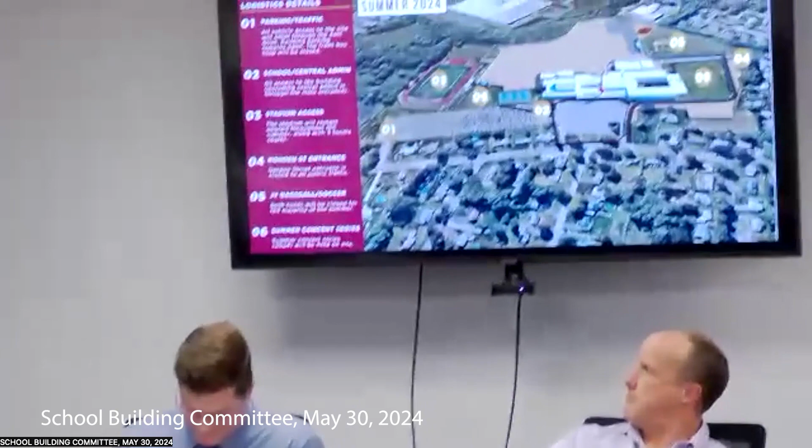All right, so after you've seen the beautiful building, we're gonna put a road in. But this is essentially what we've been working with the team on, kind of putting together for that mailer that we talked about for both the students and the abutters, just giving everybody an idea of what's going on this summer. It's just a cleaned up picture of what we reviewed in the past meeting, so I'm not gonna bore everybody with all the details unless there are any questions.

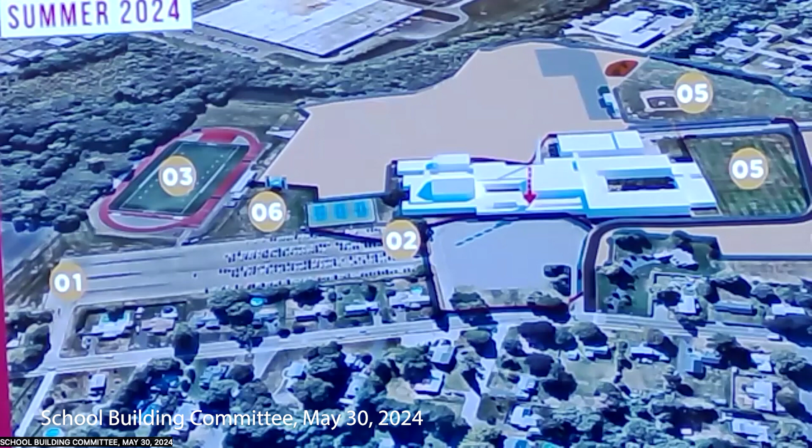Was there some pushback from the abutters on that road, right? They don't like it, is the pushback, but to fit all the needs that we're trying to fit between the school, between non-school related events, the only way to keep that soccer field is that road goes there. Rich, what's your thought?

What does this mean for us, all the parking in the front? Work for all of this is starting on June 17th. So it's not gonna be, we're not gonna be tearing all the trees out on the 17th, but probably within a week we'll start doing work up front in that horseshoe area. And we're scheduling a meeting with Gordon and Frank and a couple other people on the team just to go through in more baby steps what the schedule is gonna look like so they can get that to the staff, so we don't have to move everybody up front on the 17th.

18th is fine. Correct, yeah, it's gonna be like a slow roll, as much as I want it to look like the money pit and have just 100 people show up and start slamming stuff in. It's gonna be a fence guy, it's gonna be a lot of surveyors, fence guys. But within probably the next week is when you'll start seeing trees coming down, some trimming in the back happening.

So it clears off that front horseshoe completely, the existing? Yes. But it sounds like central office parking too, right? Yes. Okay, I just have some PDs, so as soon as I know I can tell people where to go.

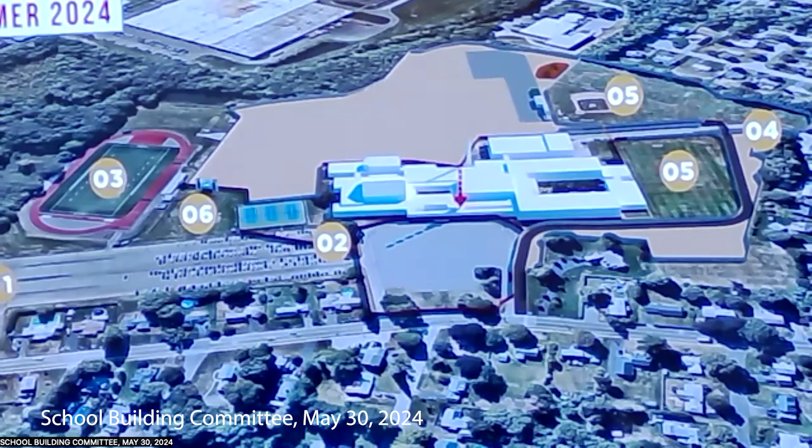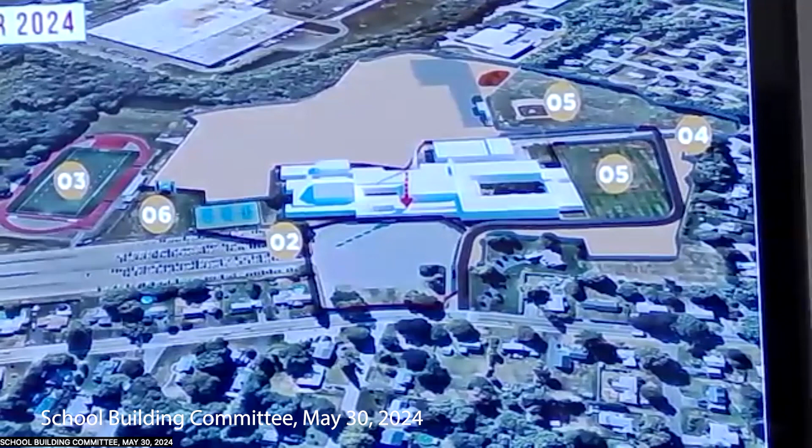So that road, is that gonna have fence and scrim on it too? Yes. Still work, like where number 5 is, where you're real close to the neighbors? So that area will basically be scrimmed on both sides. Are you guys looking to do a custom scrim or just? I am, yeah. I'm sure you've seen custom scrim, right? We don't want to put graphics on it and try to get people looking onto the neighbor's yard. Fair, we'll work with you guys.

Design, incorporating, if there's like a school slogan or something, some renderings and stuff. We'll do that in the visible areas. But just for pure dust control and everything around that area 5, we'll just have the typical green scrim.

Is that road paved? Yeah. Now does traffic go in and out of that all day long, or is there a specific time? Once we get up and running on the actual building, it'll be all day, but we'll have blackout hours based on the dismissal and arrival times.

And that I got in passing as I was driving through the neighborhood. We will establish, we have something laid out now, I forget what it is, but we basically bracket the arrival and the dismissal time, so we don't have construction traffic when all that's happening. Otherwise, they can expect to hear trucks.

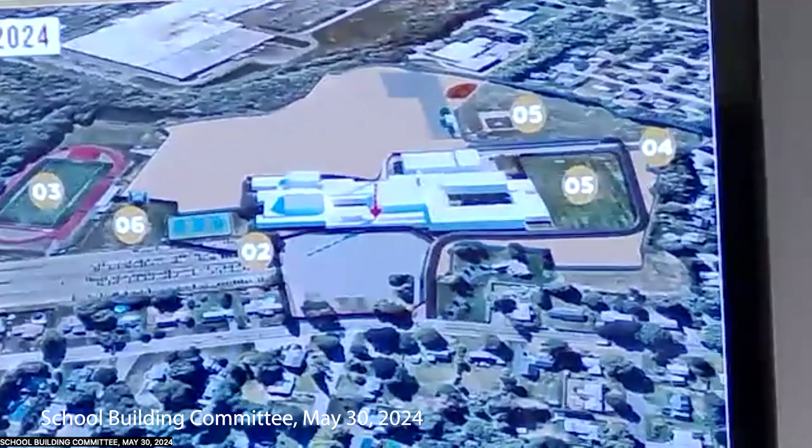What's the abutter concern? That one elbow that's kind of close to the fence? The question that came up at planning is basically why is the road so close to our property? It really was driven by, we can't put it right next to the building because of emergency access. So the only other place to put it would take out that soccer field, which we've been trying hard to save for all the programs here.

And then there were some other concerns too that we went through in all of our phasing. So it was purely couldn't this be pushed over more? We gave them the feedback, we're working with a lot of different interests, and this was the best place to put it. Some of them were concerned it was a permanent road, but we let them know it should only be there for about 2 years and then it'll be a beautiful baseball field, so. Or less. No penalty for finishing early.

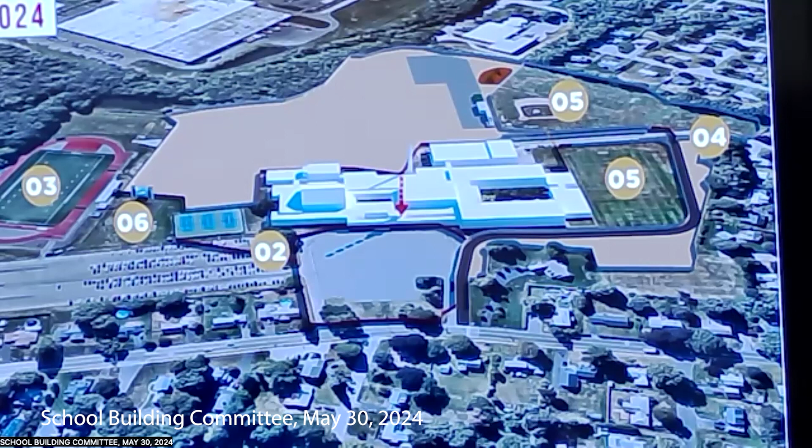Nice, I like it. But so that kind of the horseshoe, the real impact on everybody, school wise, is that work in that horseshoe area. Will maintain access to the main entrance. And it'll just be a constant communication of what's going on there with the people still occupying the building over the summer. And then the next slide kind of shows the first day of school, I believe.

So the bus loop really doesn't change from what it is now. The staff should be able to all shift over to where that number 2 is, including the district office people from the back. And then you can turn the old parking area into primarily student parking, and we'll retreat into our fence line there. Erase your line? Never erasing that.

How aggressive is the summer work? That line's 20 years old. This summer, pretty aggressive, I'll give it like an 8. Right, pretty much where they are now.

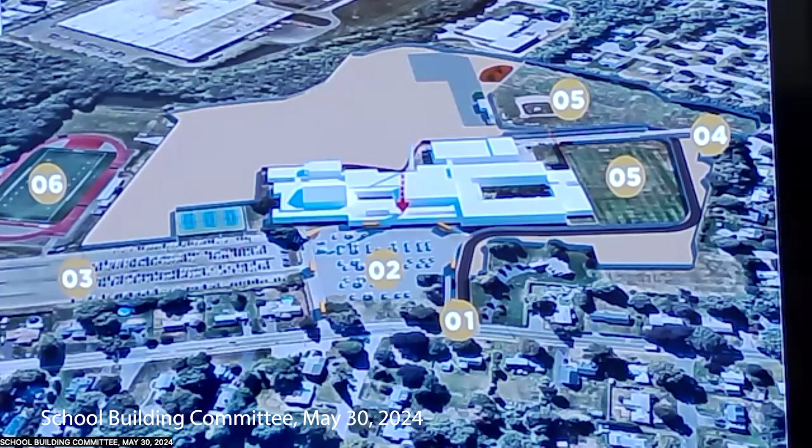Concerned about not finishing or? I'm just curious how much we're rolling the dice on this one. I assume we're buying dates, so. The way we phased it is really the return to school, everything outside of our fence line has to be done, right? We can't be messing around. Done. Some of the utility relocation, that's part of the enabling package that's gonna happen inside our fence, we have that going through September.

I know it. Because we didn't want to put a constraint that didn't have to be put on the site. There's no point when we're separating the site to be screaming and rushing to get that work that's inside of our fence line done during a busy summer already.

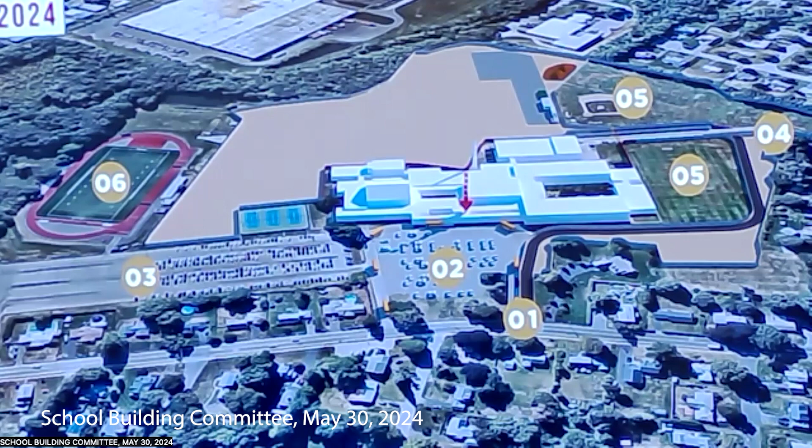Are you all set with the SWPPP plan already or? So the draft, Gagliarducci went over, we started the NOI. Gagliarducci submitted the NOI. So it should be by the 14th, we should get approval back. Is it 30 or 15-day? 10. Oh really? And they used the draft SWPPP that we had for that.

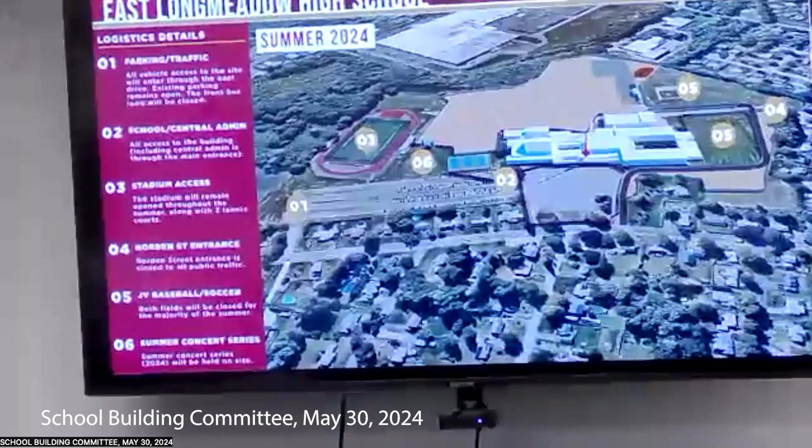Oops, sorry. When do the tennis courts go to 3? So if you go back to the previous slide, our goal is to keep the tennis courts, number 2, tennis courts, main office access, number 3, the stadium, and number 1, that's the primary entrance, all that we're gonna try and keep available to the school and the community for the summer.

And then number 6, we're hoping to work to locate the bandstand for the summer concert series in a location where we can still do some of the utilities in that area during the summer, but always having it available on Wednesday when we need it. And then they'll stay online for the fall. The rear 3 courts will pretty much come offline in June when we start putting the fence up. Okay, I don't think it's set.

And then there was a request, or it came up somewhere, about the lighting for the court that's gonna remain online. We think that's doable with just the research we did, but now that we have an electrician on board, we'll be able to confirm whether it's yay or nay with what we're doing. I mean, but our intent, if we could keep lighting. Yeah, as we did, Kevin's done some incredible work.

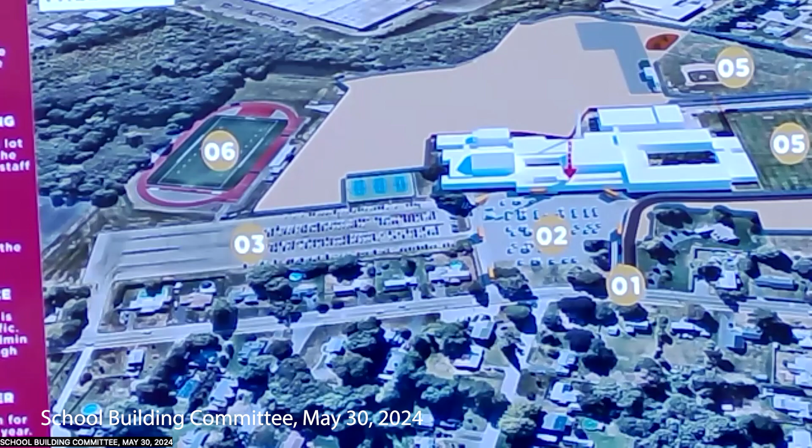He can go to double sessions. He's got us booked for the first 2 weeks of the tennis season, which will be a first ever where weather won't bother him, because we'll have 3 courts at the Enfield Tennis Club and 3 courts at the Ludlow Tennis Club. So we'll have the best in shape in those first 2 weeks we've ever had. He'll have transportation, already priced out running those 3 courts the way we'd run the ball through the gym. So we're looking at about $19,951. But the lighting would be key.

So that's how we wrote it. Essentially, they're going to be removing the lights for the rear courts and leaving those lights up. Once we get him on board and start really investigating how all that's wired, we'll figure out what that's gonna take. We'll have daylight savings, which is helpful, but if we had the lighting, that'd be great too.

Am I accurate that we're looking at 19,000, just to put that whole public discussion out in front of us? Temporary court is 100,000? We looked at 2 temporary courts based off a sketch from the design team, with the striping and everything, and it was basically $260,000 for the 2. We're about 7%.